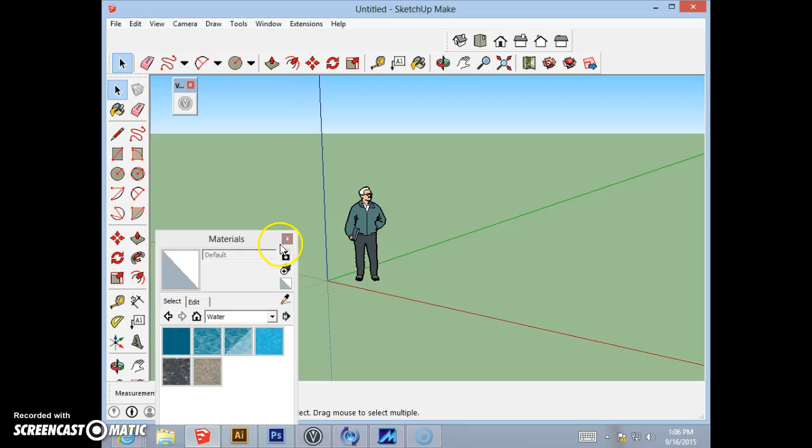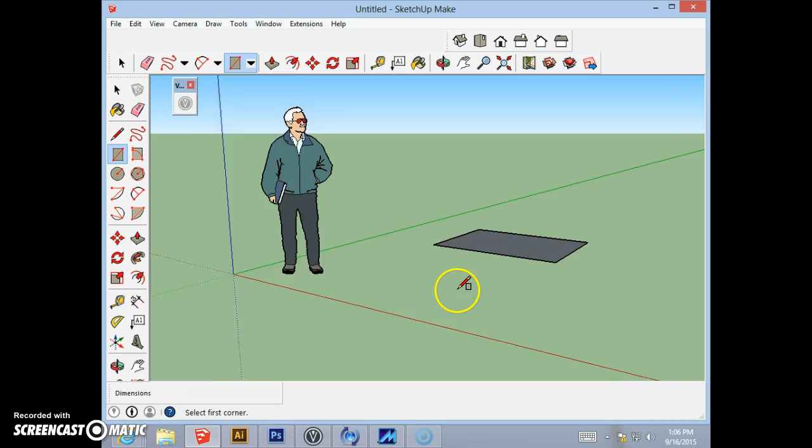Okay, just some more basics about building your object and getting forms out of what you build. One of the toughest things is getting organic shapes, so I'll try to show you a couple of things about that. But for the most part, most of the things you're going to build in SketchUp are going to end up being very geometric. But there are some ways you can adjust your object a little bit.

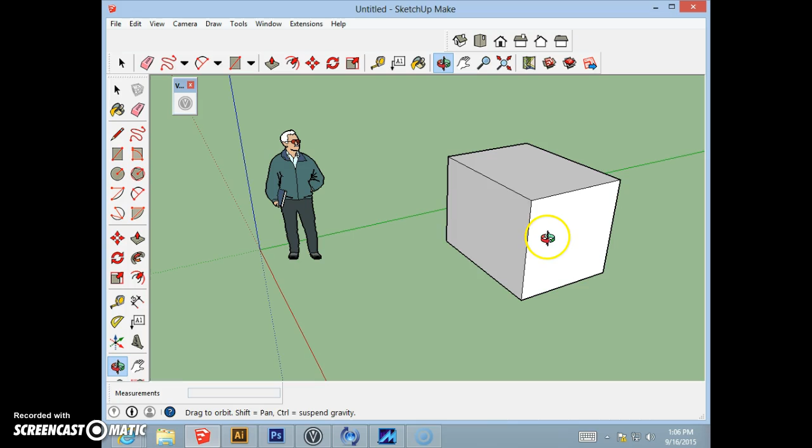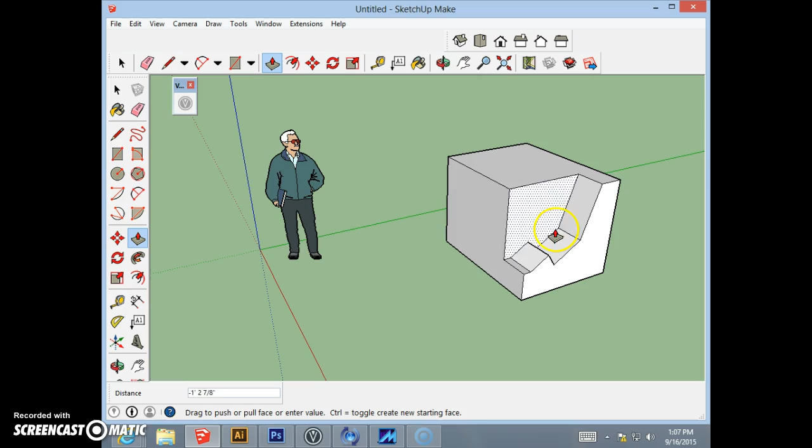For example, with this, I already showed you the idea of drawing on one side of a form and then using the push-pull extrude tool to push away parts you don't want. You can really do a whole lot with that. On one side of this, you could really design what you want this object to look like. I could push all of this away, but I don't want to try to build cushions on top of this, so that's why I want you to build your cushions separately.

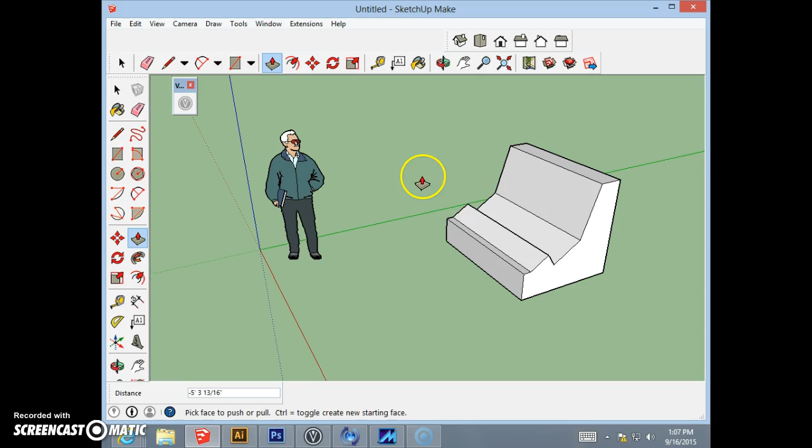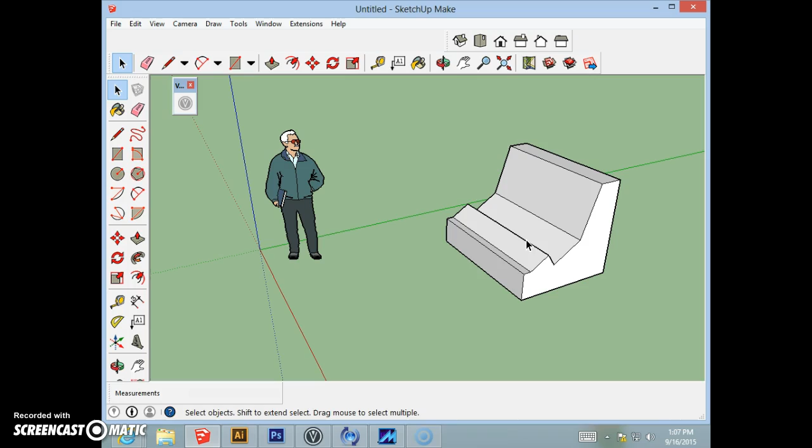But let's say I did want to try to do some adjustments to this - let me show you a different way of adjusting this. It's good to save things as components, but I don't have to save this as a component just yet. Let's say I wanted to adjust this part that really extrudes up too high. It could be an interesting place to sit if you fit in it nicely, but if you're measuring somebody's leg length, it's either not long enough or too long.

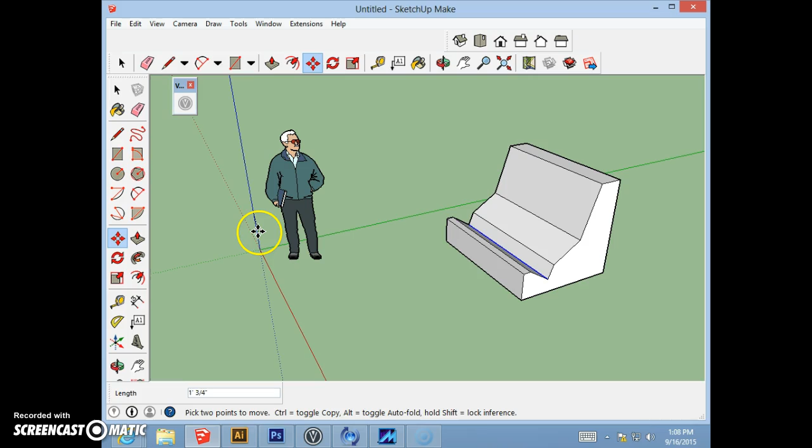So if I wanted to adjust that, with my selection tool I could select just that single line. Be aware that in SketchUp you can not just move objects, but also adjust single lines. With that line selected, I go to my move tool - the better way I've found to move stuff, instead of just grabbing and moving it, is to use your axes, your X, Y, or Z, your red, green, or blue line. Let's say I want to move that up along the blue axis - I put my move tool on that line, click down, hold down, and that moves that line directly up. That's another way you can adjust some of these shapes you're working with.

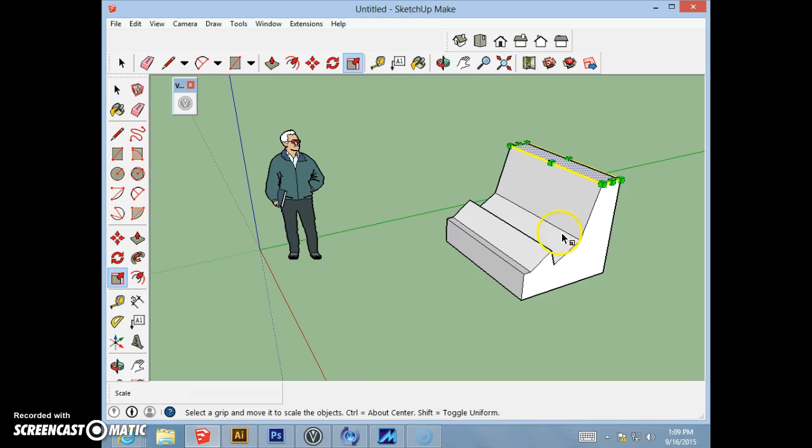Also, we looked last time at using the scale tool. Let's say I wanted to scale the top of this to be thinner, to come in at an angle, with that top face selected. I go to the scale tool. With most tools you're going to have options of using your keyboard for variables. If you try to do it without using a lock, it's going to get askew, so I'm going to hold down Control, and that gives me a more even move. Do think about that as you're working with these different forms.

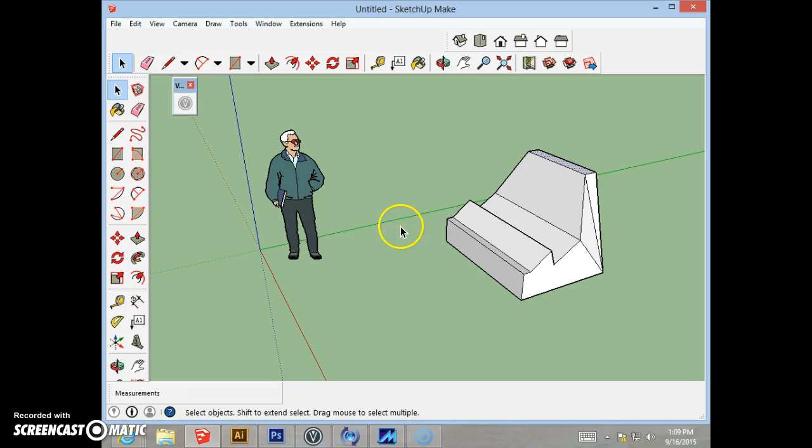But let's go on to the pillows. Ideally the pillows are going to be a little bit more round, so let me show you how I would probably go about this. As you guys are starting on this, test things out - just make this a playground for experimenting, trying to build different sorts of forms.

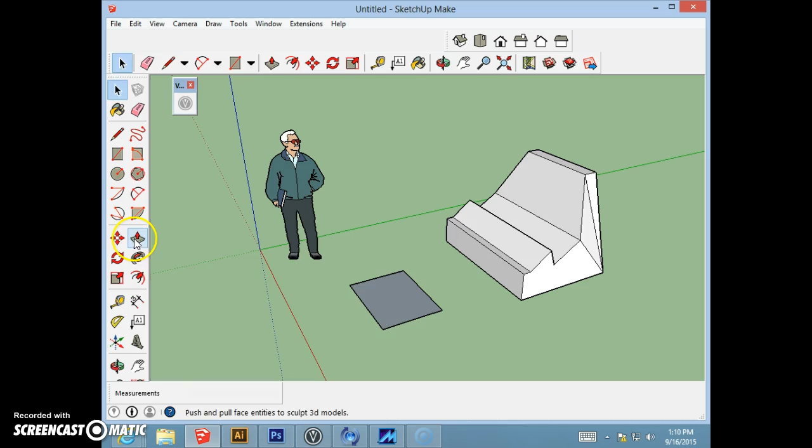If I was going to build a pillow, I like to carve stuff out, imagining I have a block of marble or something like that. So what I would do is draw myself some forms on the face of this, trying to draw something that's very oval-like. I go to that point and go up, then do the same thing from that point to that point and go down. Then I get rid of everything else I don't need - first, with my eraser, get rid of the lines I don't need. If I wanted to put more forms into this, I could do that.

But realize this about working on curvilinear forms - you can't draw on top of them. The way I'm able to draw on top of these flat surfaces, I can't do that on top of these rounded surfaces once I make them. So let me go ahead and extrude this part away.

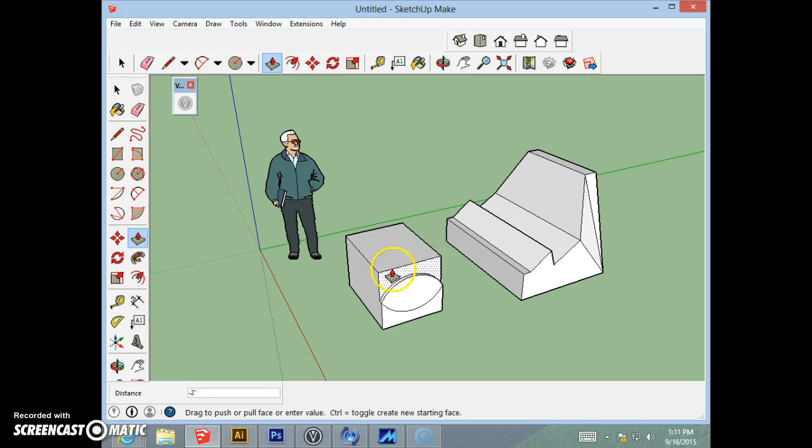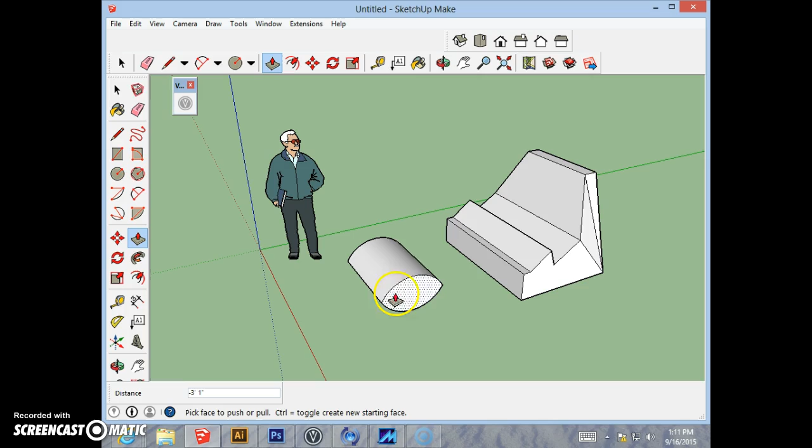Right now, this object is floating in air, and that's the utility of making an object into a component, because that way you'll be able to grab it and move it. Right now, I can grab it and move it, but if I intersect it or lay it over something else, I'm not going to be able to grab it again. So before I move this, I will actually turn it into a component.

But if I was trying to make the edges of this a little bit more rounded, or give the illusion of being round, probably what I would do is take several of these and actually work with them together.

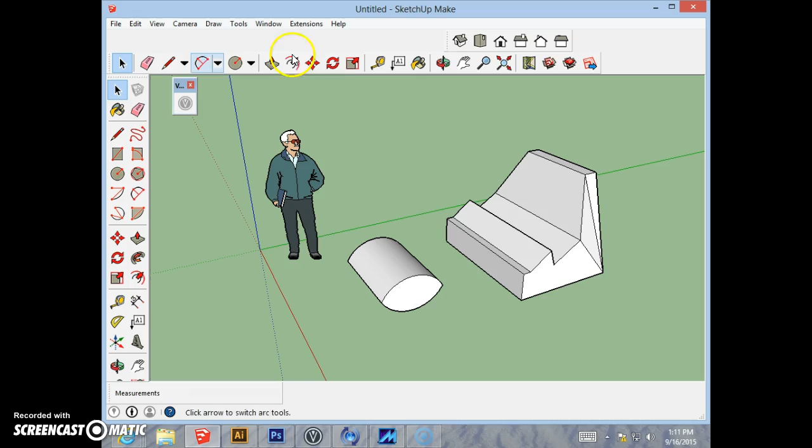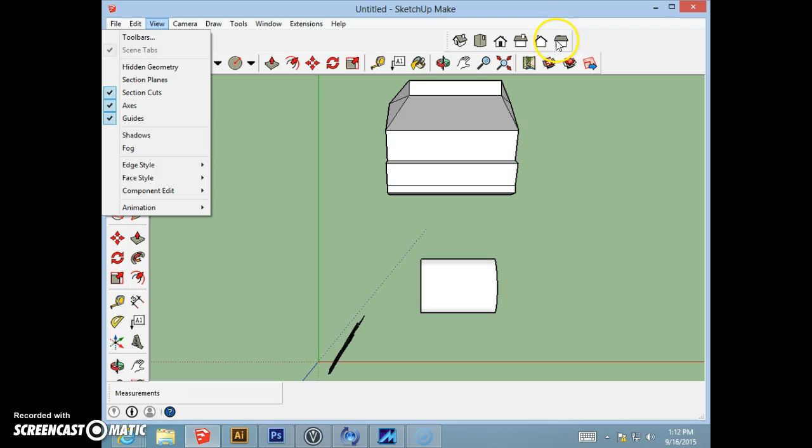But before I do that, what I'm going to do is take an overhead view of this object. And again, if you don't see these tools, you're going to be able to find them on a PC in your toolbars. It's a little bit different on the Mac. You'll actually have to go to toolbars and then drag some of the tools that you want onto your workspace.

But I prefer to look at objects with parallel projection. That way it looks perfectly flat. It just makes more sense to me. So now I'm going to select this, make it a component. You could retitle it—sometimes that's useful.

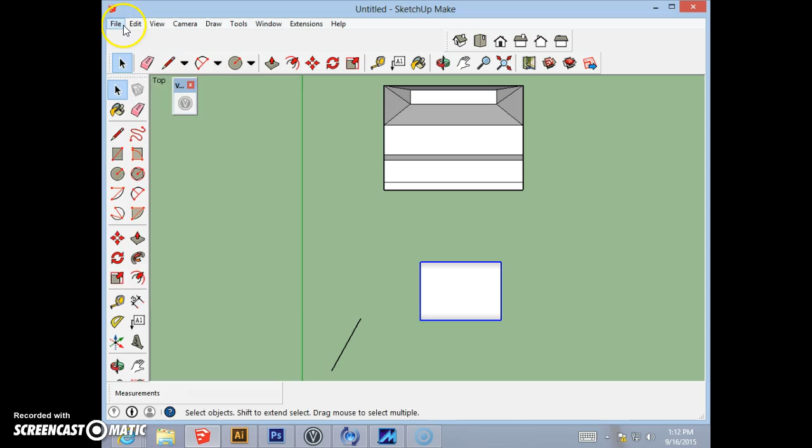To start combining this object together, I'm going to actually copy it and paste it in place. Let's move it a little bit. Now this other one I'm going to rotate. And I think I rotated that wrong. Rotation is hard on tops of curved surfaces, so I probably should have rotated that earlier.

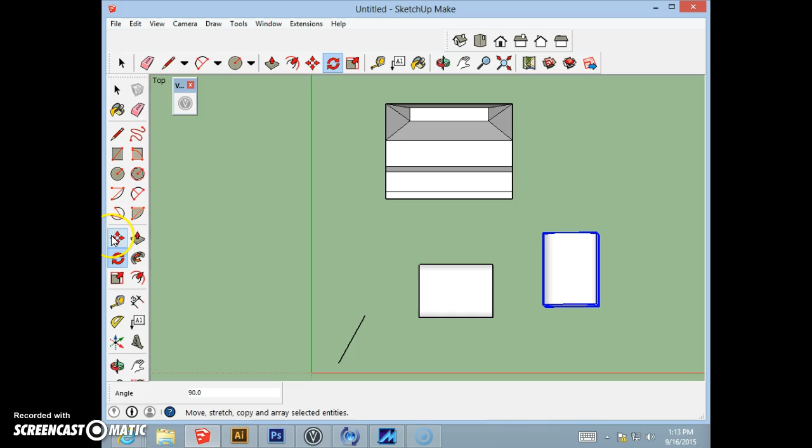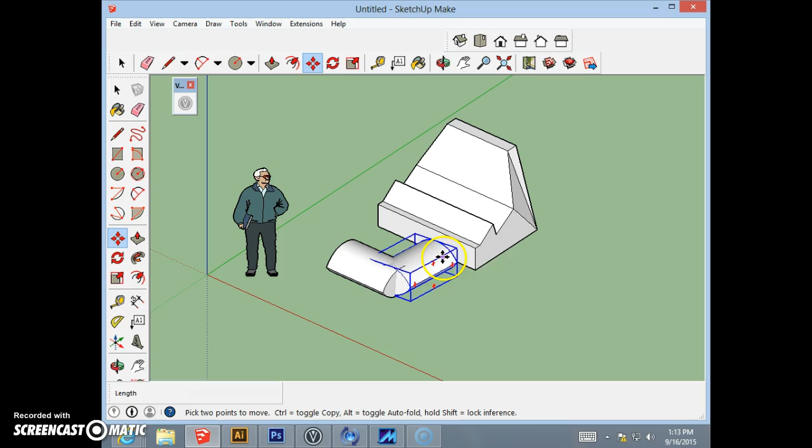That still looks wrong, but just for the sake of moving on, I'm going to move on. But you're probably going to be able to get some different sort of shapes by combining multiple components, and then you can regroup those components once you've done that into one sort of object. So what I probably would do with this here is actually get the objects together first, then start to scale them.

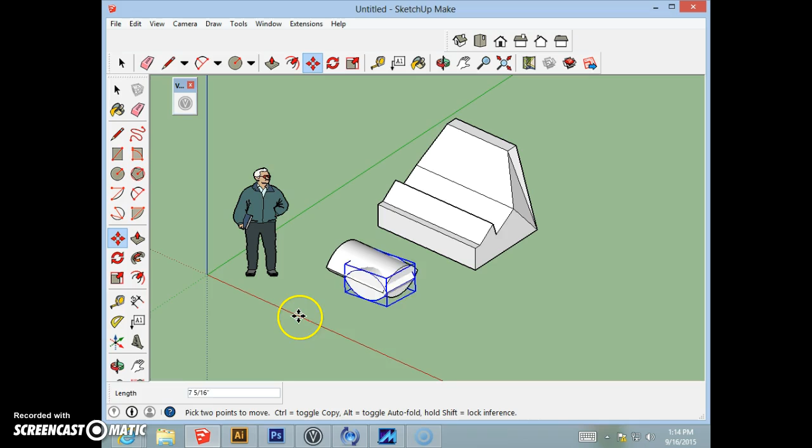Just through use of a lot of different tools, to really get the objects to sort of get a good combination of one another. And again, this is where it's really useful to use the axes to move stuff around, instead of just trying to directly combine something with something else.

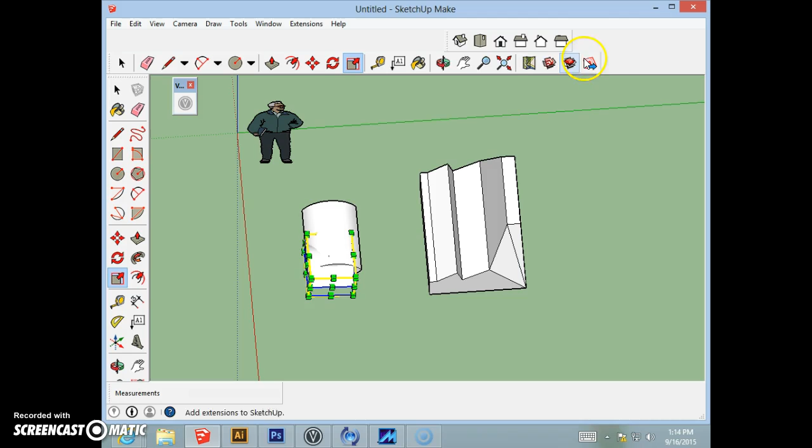Also, you could try to make some purely round elements to pull into here. Let me move this some more. Go back to this. And these don't look comfortable so far, these pillows.

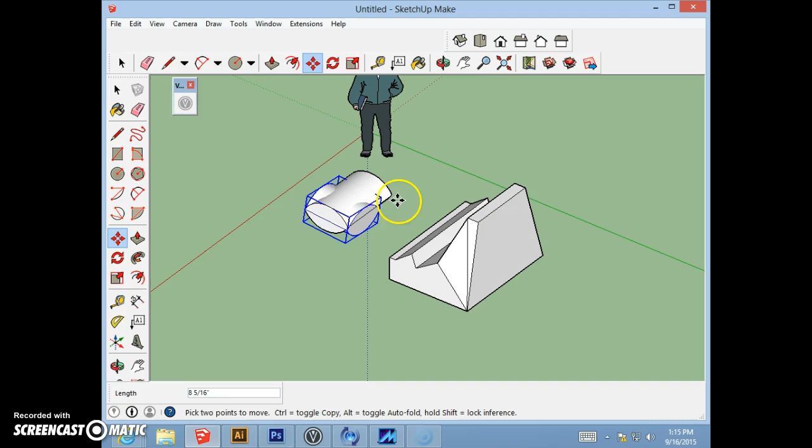Also for this project, if you guys want to add patterns into SketchUp, you can do that too, once you start trying to put materials onto these—that's perfectly fine to do. There's lots of patterns inside of SketchUp, but it's pretty easy to browse for. If you find a JPEG or an image with a pattern or texture that you like, it's easy enough to browse for something else you might want to put into it.

But let me just do one more thing to this. That's a pretty weird looking pillow. There it is—I think that's possibly... I've seen a pillow like that.

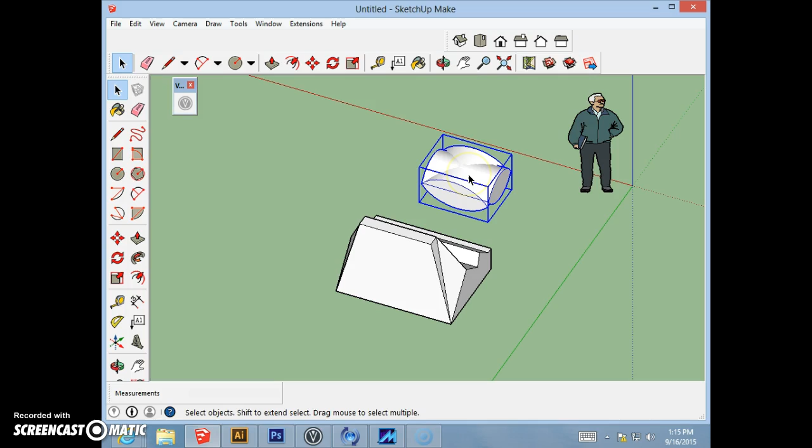But again, once I get this where basically I want it, once you've got a combination of the different objects you're working with, you can make a multi-component. But then if you ever get to a point where you want to work on a component, do something on it, just double click on it, and you can go into that component and actually make changes to that object a little bit further.

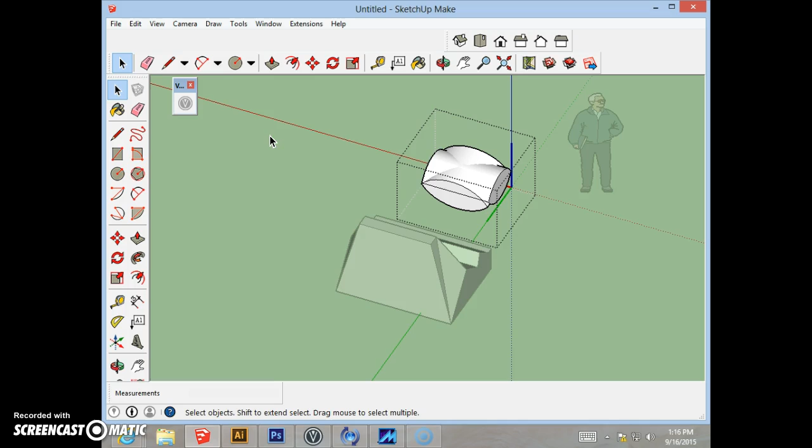Let me see, one more thing I'll try to demonstrate is how to make a sphere. I'll probably have to YouTube it. If I'm not able to do this, you guys just YouTube how to make a sphere in SketchUp. But let me see if I can remember how to do it. You start off with a circle on the ground, then I've got to draw a line that goes straight up.

Then I've got to place another circle, but have the circle... yeah, wait, I gotta do this first, because there is a way to make spheres in SketchUp. Let me see if I can remember how to do this. I've got to somehow get my circle to not be laying on the ground, but to be on the blue axis. That's why it's blue. See if I can get it to go another direction as I'm trying to do this.

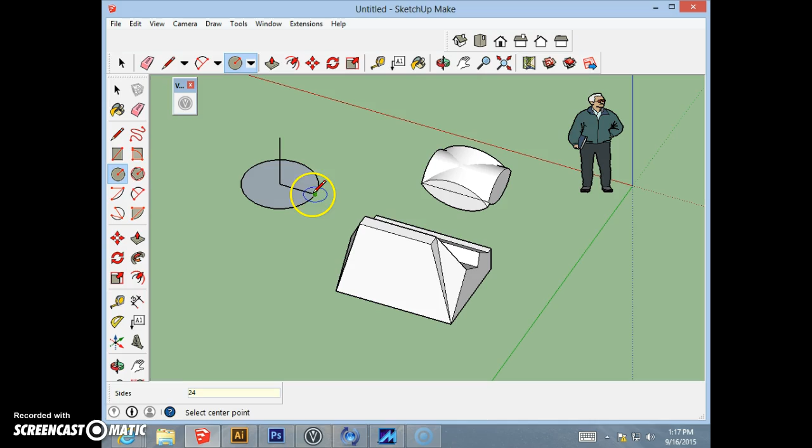Alt, Control, Shift, New. Yeah, I'm going to have to find it—well, you guys look for it on YouTube. It's pretty easy, but I cannot remember how to do this. But there is a way to actually make spherical forms.

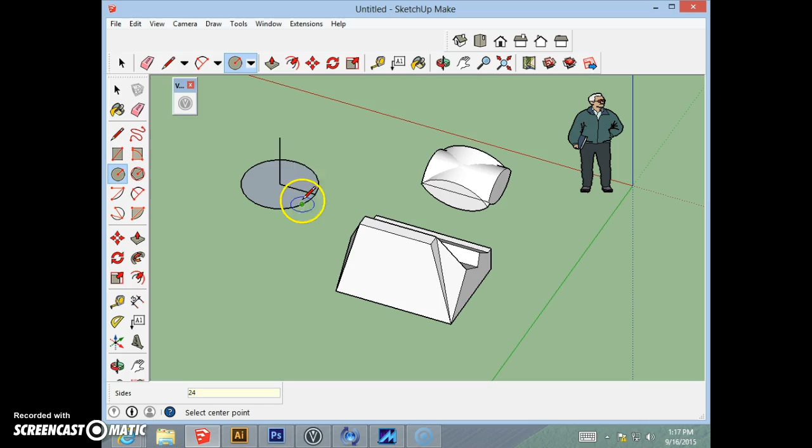But basically, once you get this shape, a circle to stand up, you're able to use the Follow Me tool to get the sphere to come all the way around. And if you want to use something like that also for your pillow-like forms, then you can do that too.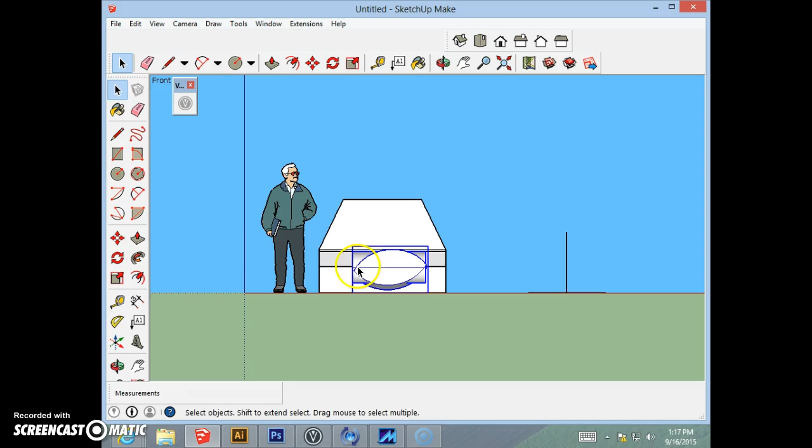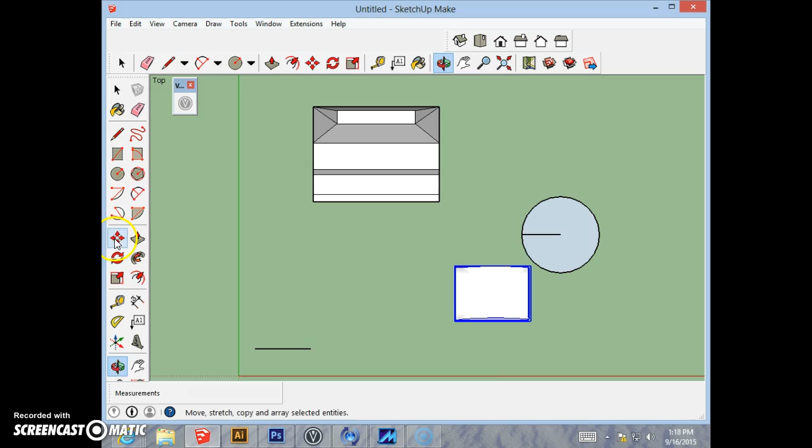One more thing—again, the real use and utility of being able to look at this in this parallel perspective view is that's how you're going to be able to most easily take your elements and put them together. I haven't made this into a component yet, but ideally you would make that into a component first. But once you do all that, it'll be pretty easy to move your elements around and place them however you might want to place them.